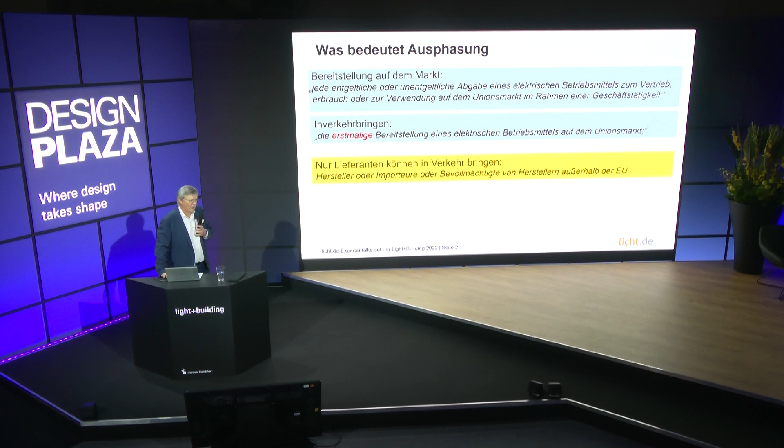But really, bringing it into the market means a first-time availability of an electric feature. This is what this refers to. Who is allowed to really bring it to the market? Suppliers, importers, or representatives of manufacturers outside of the EU are entitled to place such a feature on the market. So they are the recipients of this directive, so to say.

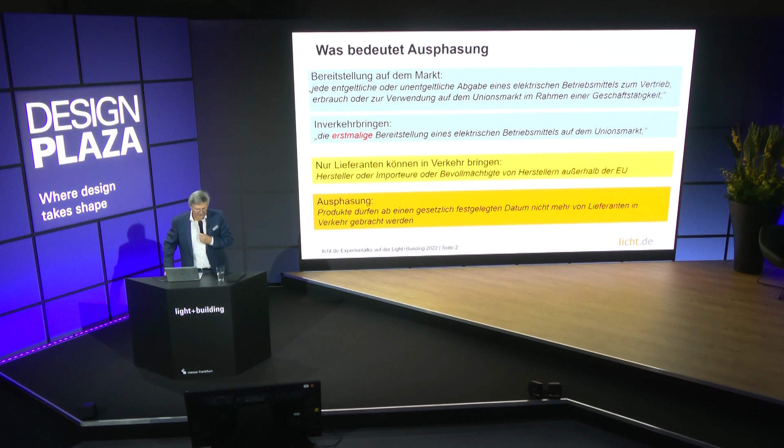They have to abide by this new regulation. Phasing out means that a product, from a specific point in time laid down by law, may no longer be sold. And there is always some confusion. We see this from letters we receive. This does not mean that you may no longer sell a product which has been placed on the market. So once it is available for retailers, you may continue selling it. And it does not mean you are no longer allowed to use it either. So fluorescent lamps that you already have may be used also in future.

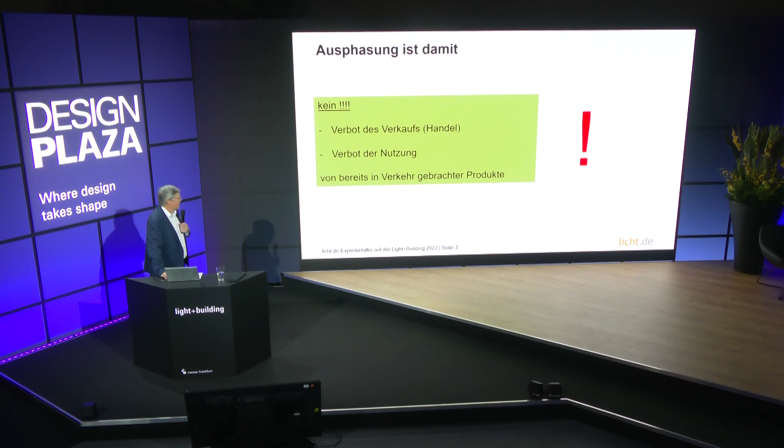And as a matter of fact, the question is, from when is it no longer allowed to place a feature on the market? For many years, we have had the Eco-Design Directive. Energy efficiency is one aspect here, so minimum requirements regarding the energy efficiency of light sources. And if you no longer comply with these, you may no longer place such features on the market.

But there are other parameters included as well, for example, flickering in case of standard light fixtures, or color rendering, minimum requirements regarding color rendering. And in addition to this, and not many people knew about this, was a material ban. So according to ROHS, specific products which include certain materials may no longer be placed on the market. This was an issue some years ago when it came to lead. Many manufacturing processes had to be changed.

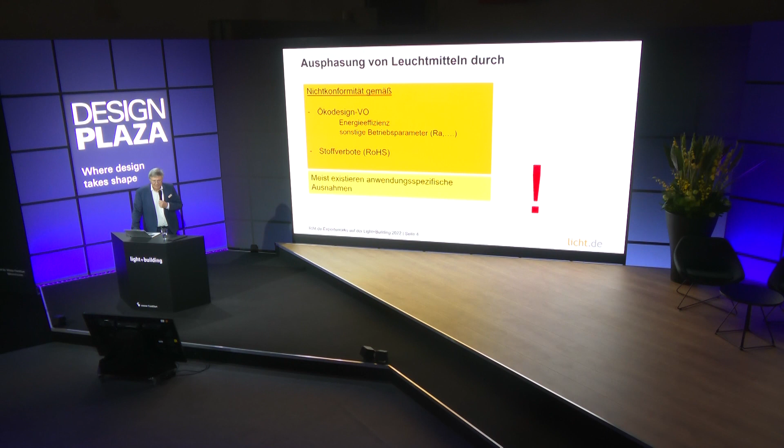Mercury is another of these materials. And in the lighting industry, we had a lot of lamps including lead, for example. Also lamps that were supposed to save energy, they included mercury, and they were no longer allowed all of a sudden. So sometimes the EU makes life difficult for manufacturers and users.

There are always some exceptions, however, when it comes to specific directives. Phasing out luminaires has been an issue for quite some time. It started in 2009 with the incandescent lamp, and people said, if we no longer have this light, this is very, very bad for people because we no longer have a healthy light. But it was then continued, this development.

New products were added, and in 2015, the HQL lamp was prohibited, then high voltage lamps in 2021, T2, T12 lamp, low volt halogen, and halogen lamps with more than 2,700 lumens.

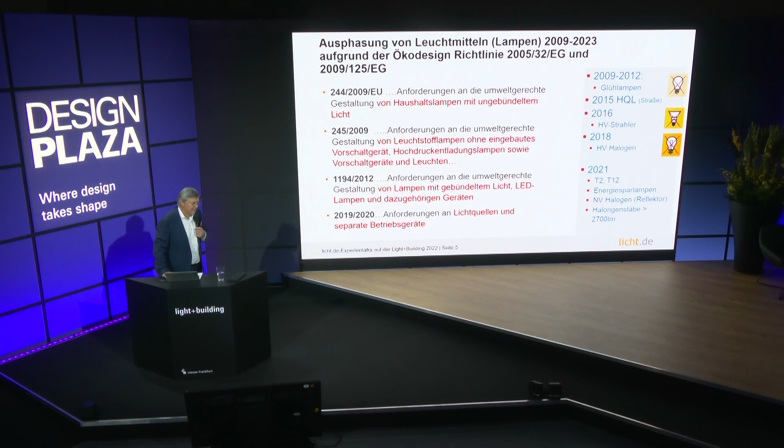In 2019-2020, then there was a requirement regarding light sources and separate devices. The EU wanted to make sure that people save energy, and via the requirements regarding energy efficiency, the T8 lamp was supposed to be phased out starting next year.

Next, environmentally harmful materials such as lead, mercury, and so on. Such materials had been banned quite some time ago, and for several products, on part of the industry and also on part of the users, you may request exceptions, which are then granted for a maximum period of 5 years. And if there is no replacement or new technology - in case of UV lamps, for example, you need this specific lighting technology, including mercury - the Commission will look into the requests, and there can be another exception for another period of 5 years or for less than 5 years, and that's the end of exceptions.

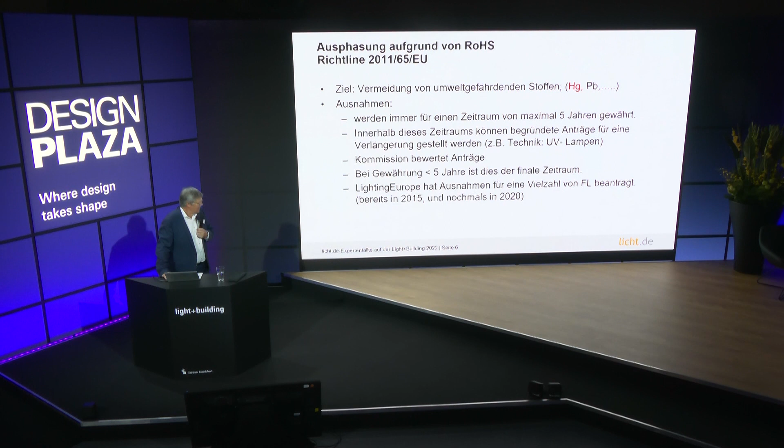And we have an association in Europe. Our association is a member association here. We asked for certain exceptions. Lighting Europe is the European association here, but the Commission did not take any action. But then after 5 years, the Commission gave us, or granted, the exception.

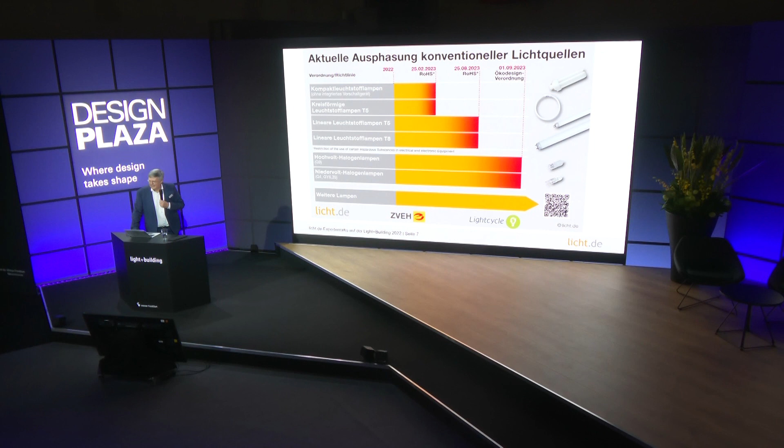I would like to refer you to the homepage of licht.de, where you see a good overview, and you can download a lot of information there. It's rather complicated.

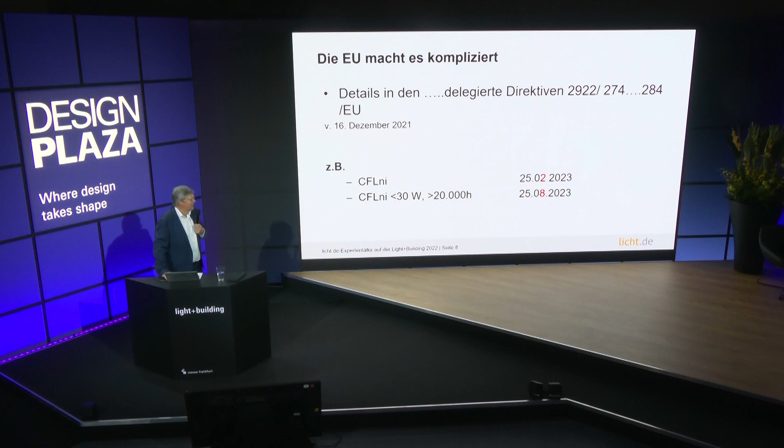EU made it very complicated because depending on type of lamp, there are different directives. Directive 2922/274 through 284 show the details, and you can tell by the compact fluorescent light, depending on the parameters, all of a sudden you have a gap of six months here. We do not really understand why, but well, this is what Brussels decided.

There is also a paper by our association, ZVEI, showing more exceptions for fluorescent lamps. On the left-hand side, you see the respective sections, and it refers specifically to UV lamps, but also lamps for other general lighting purposes and for specific lighting purposes. Well, this can mean anything.

No specific definition. For example, if you inspect surfaces, if you have calibrated lamps, they include a lot of mercury, and this is still allowed, even though they include more mercury than regular fluorescent lights. And emergency lamps—so theoretically, you could place on the market a T8 lamp, and you could state this is for emergency lighting, and you can continue to place it on the market.

So this really is a loophole. Something is phased out, but well, through the back door you could still place it on the market. I guess this will not happen because this is an almost non-existent market. No fluorescent lamps exclusively for this type of market are being produced, and we clearly point out that this is highly unlikely to happen.

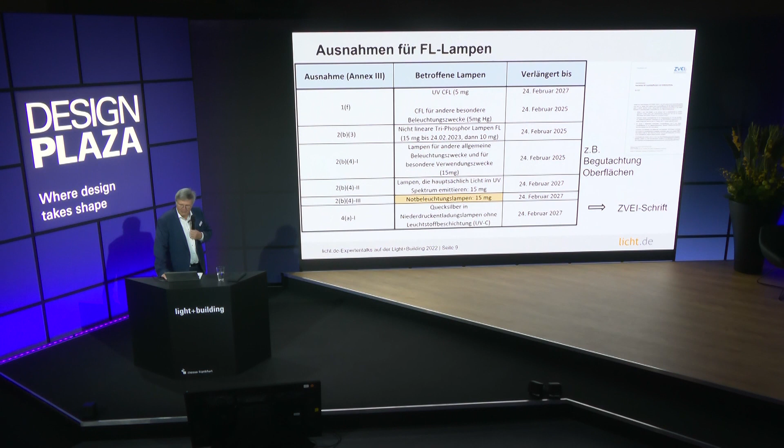And this goes to those manufacturing emergency lights. In a very short period of time, no such lamp will be available. What about high-pressure discharge lamps, which include specific materials that are no longer allowed?

By 2027, high-pressure discharge lamps with metal vapor and halogen—the same goes for sodium vapor high-pressure lamps. Here there are some exceptions if they only include a very low content of mercury.

It's another five years. For sodium vapor high-pressure lamps, it depends on the color rendering. Some exceeding RA60, for example, or RA80, they will be phased out after five years. And we have to wait and see what will happen during this period of time, whether or not people will request an exception—we don't know.

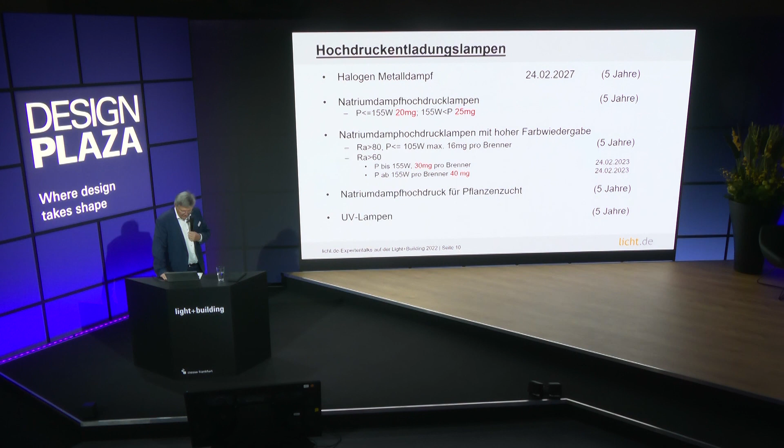We are aware of the fact that in many areas LED is gaining in importance. If LED is more economical than traditional lighting technologies, probably no exceptions will be granted for this type of lamp, because the intention is to reduce the mercury available on the market, and in the medium term, of course, we still want to save energy.

Now, we say it's high time to take action. Licht.de publishes a lot of information on our homepage. Members also spread information. And if you have not looked into this matter so far, maybe you should inspect your workshop, your offices, and find out what kind of lamps you are using.

Very often it's surprising to see that there are old light fixtures dating back 5, 10, 15 years, and you have to find out what kind of fluorescent lamps these are. Do I have to take action? For how long have I been using this light? Is it maybe a T5 I only installed 5 years ago?

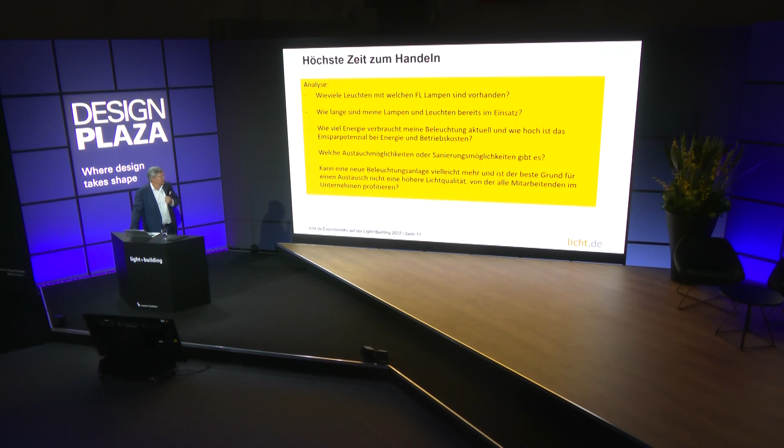To replace this or throw it in the bin does not make any sense economically speaking. Maybe you can then use a substitute lighting fixture if it's okay with your lighting technology. And the second thing is, how much energy does my lighting consume? You need to come up with a checklist and understand what you use, what about the average service life, and then understand how much energy you can save if you replace these lamps with different ones.

So replacing one lamp with another is always relatively simple. However, in the case of lighting systems where the illumination is of better quality, which are also equipped with control technology, in this case, maybe you should wonder, isn't this the best solution in the long run, money-wise, but also light quality-wise?

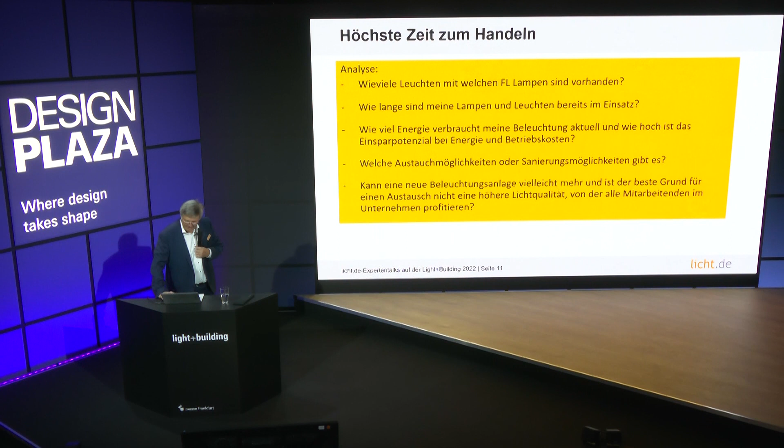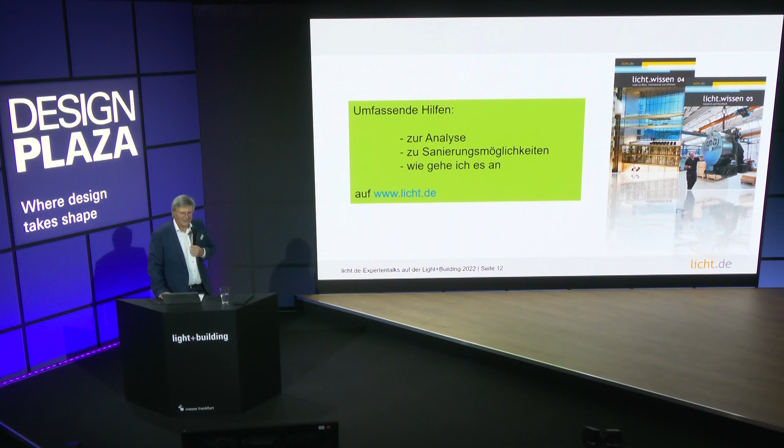All employees in your company would probably benefit from higher quality lighting. Licht.de, as I said, provides a lot of information and support regarding the analysis, refurbishing opportunities, and how to approach this. So I recommend our homepage—take a look at it, download the information, and ask the manufacturers, our members. Thank you.